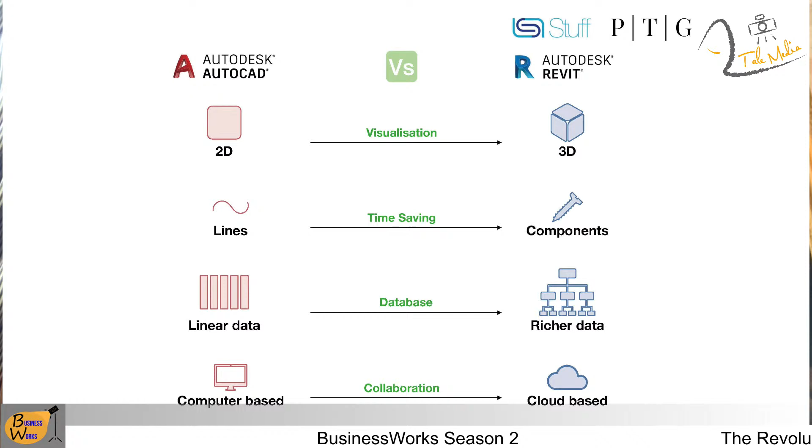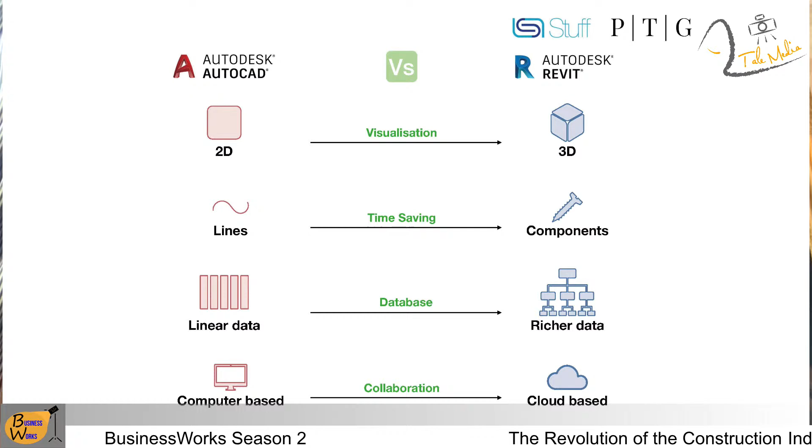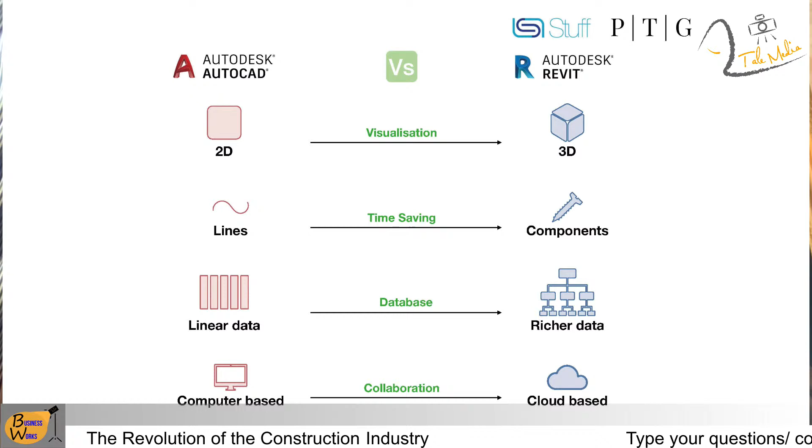So in effect, what is the difference between the Revit package and the CAD package? With CAD, it's very two-dimensional. It originally was developed for aeroplane engineering and design, so it's very linear, it's all about line. If you look on the left-hand side, down the pink boxes, it's two-dimensional line, it has linear data and it's computer-based. With Revit, it's three-dimensional, because it's componentry - you pick walls, doors, windows, and click them into your plan, but then you have 3D richer data. It also links directly to VR, so immediately you have a VR model to walk around and look at. It's incredibly fast to move, and that is basically how you can do jobs within days that take weeks and possibly months using the more traditional routes.

So these are all software packages we're talking about, ladies and gentlemen. Well, it's just two - it's Revit versus CAD. It's the difference between linear and three-dimensional, if that makes sense. So CAD is a software package that they are using right now, and some industry experts are trying to stride away from CAD because it's a 2D model, into a 3D model, which is the Revit software package.

We're going to talk more about these particular packages and how it works in our second segment. But when you talk about these software packages, Neil, you said certain companies aren't even thinking of using these new packages - so how hard is it for a student who's learning these new techniques to go back to a 2D software system where it's the norm for the industry, at least for now? How hard is it to go for a much older software package?

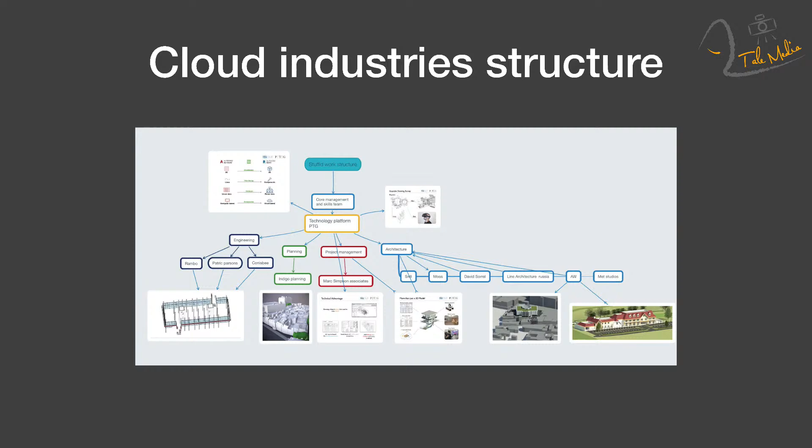What we're doing is building a platform, that yellow area, which, as you can see with the diagrams, uses virtual reality and pulls all the componentry parts using Revit onto that platform so it can be seen at any time, and any clashes, for instance when a beam hits something else incorrectly, will be flagged up. This isn't in the industry at the moment. The technology platform isn't there because the engineers use Revit for their own use, and the other guys do their own thing as well, so it's very difficult to get a clear dashboard.

Okay, so Angela, did I explain that well? Because I'm using you as my... That's the problem, yeah. I think it's very clear as to what the procedure is. So once that's in place, now I'll go to simpler stuff.

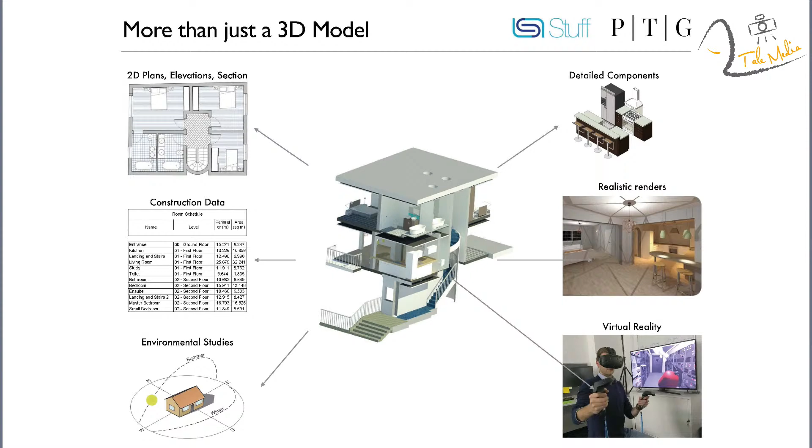If you could go to number 13, to explain how this works. Here is a model we did when developing it. On the left-hand side, that's a typical drawing, but done in Revit, so it's in 3 dimensions. The construction data below is automatically embedded in the software, and you can link it to sun tracking systems and everything else for light. From that drawing, I press a button and get a 3-dimensional model you see in the middle. All of those elements contain componentry things that can be drawn from manufacturers' catalogs and so on. We then press it and put it into virtual reality, and we can make changes in virtual reality and see how it goes. So everything is built around that one straightforward drawing with the dimensions and the componentry. That's how the system works.

Let me see which is the next slide. If you just go to number 15, this shows you how the componentry works. This was drawn, I promise you, in a very short period of time, about a day. It's a very large shopping centre in Northampton. If you look at the drawing in the top right-hand corner, you can see how all that componentry explodes out. That's how the drawing's done. If we use CAD, it's all done by line and connected. This isn't—it's all done in that way, and that's what enables you to do when you're designing things.

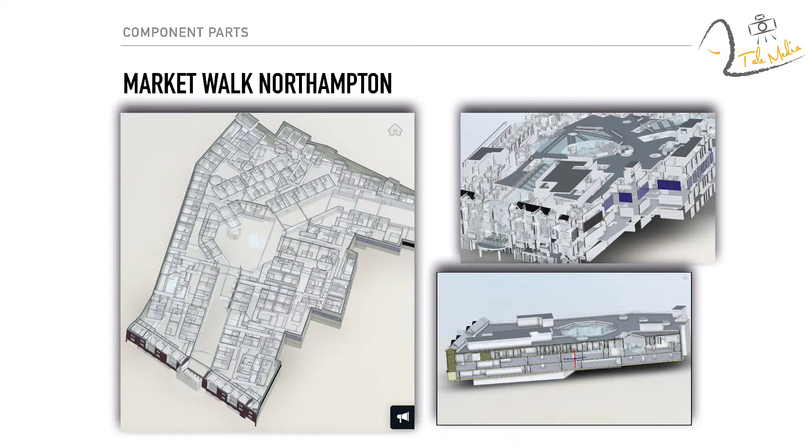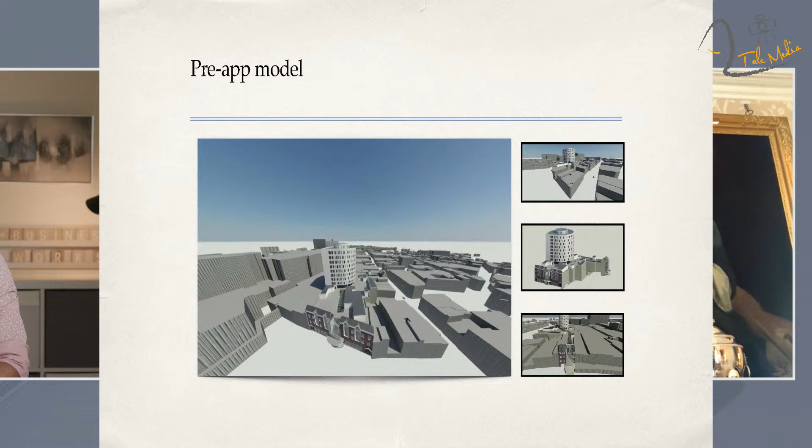If you could go to number 20. So once you've got all the tech lined up, everything's done. By the way, we can do surveys by satellite that will be accurate within 50 millimeters on the buildings themselves. But just to give you an example of how flexible it is, we had to come up with a few ideas. This one is for a student residence. If you could then click to the next slide.

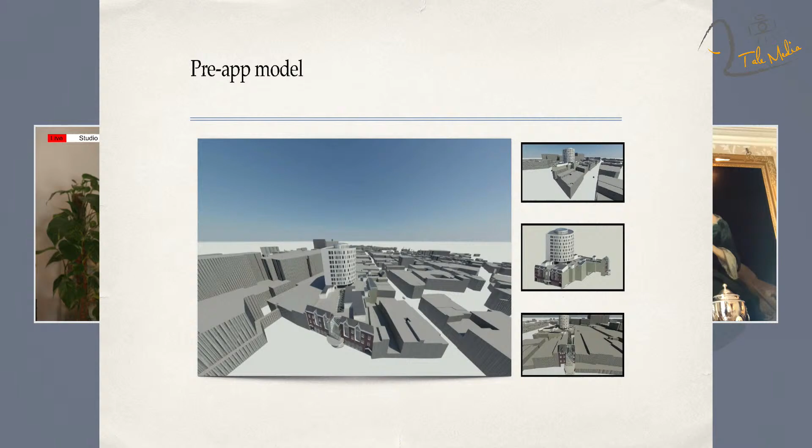The local planning authority didn't like the height of the building and they didn't like the way we put it into the context of what we were designing. So we then were asked to look at a different scheme. Again, within a day, no more, we used the componentry design and we dropped this in, which is 3-dimensional, and obviously it's got VR capability.

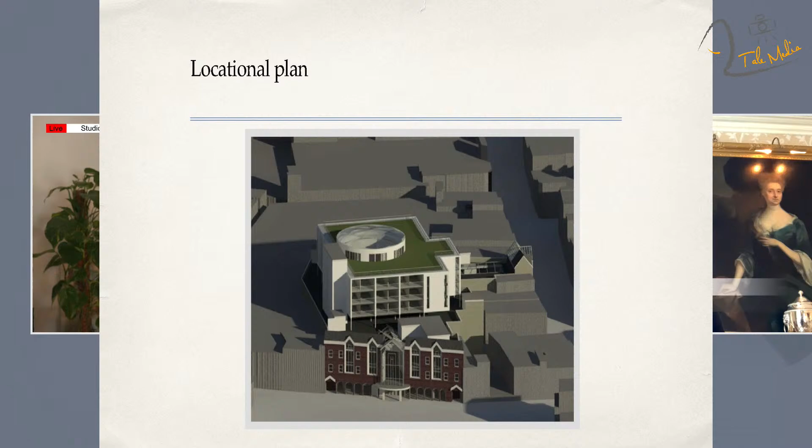And if you could move to number 22, again, what the planners wanted us to do was to reflect the design of the front of the building. So if you look at the picture on the right-hand side, you can see there's a lot of verticality in that design. But then with the residence block, we needed to reflect that. And that's the planning scheme that's going through.

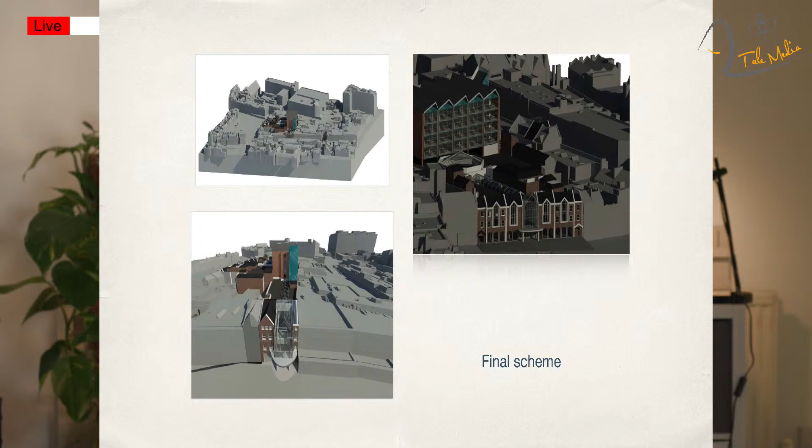Now, in a previous life, I promise you, to do 3 of those drawings there would have cost an astronomical amount of money - maybe 60, maybe 100, maybe £200,000. All of this was done for under £10,000.

So that shows you how the flexibility goes, but more importantly is that technology platform that feeds all that stuff into it so that we can get very quick responses, very quick costs. And the client - the most important thing - is able to see the changes that are required, which is the most difficult thing, because I've spent my life doing architecture. I have a 3-dimensional mind, I can see things, but it's not necessarily a God-given thing for everybody. So to help people understand and make them understand why they're doing the decisions is a very important thing. So I hope that helps.

Indeed, Neil. And then I just, like when you started explaining this, I have a brief question for you. Let's say when you talk about this new system, this new 3D system, you were talking about there will be less time. It's been in the market about 7 years. 7 years it's been in the market, yeah. Okay, so it's been in the market for 7 years. So what do you think about the time and the resources and the money that people spend on, let's say someone's constructing a shopping mall, and then if a construction company is using Revit as opposed to CAD, what are the benefits that they will gain? Is it time? Is it resources? Let's say, is it the money that you spend? What are the main benefits of this?

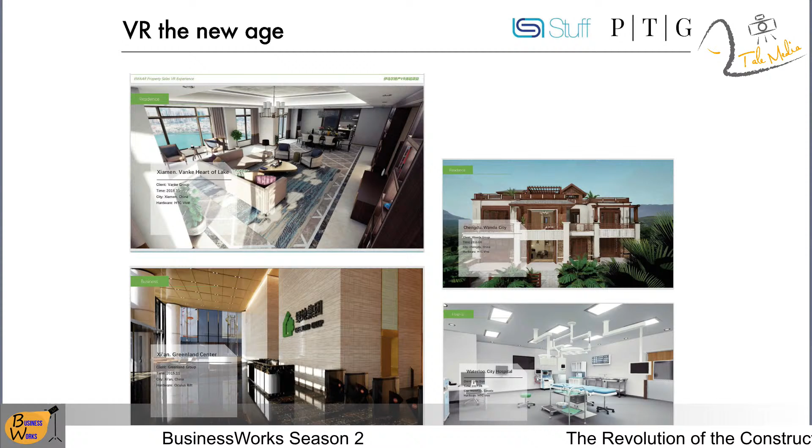Let me take you through a little journey. If we could go to slide 12. This is really the clever end of the software - what you have to do is put in all the drawings and componentry, which as we've talked about, is faster and uses less people to do. It's very effective. Then there are different types of software that can be hooked into Revit to produce virtual reality walkthroughs using headsets.

The trick about virtual reality is, for those really into the technology, you need to make sure where your data points are within certain areas of a building. If you've got a very big building, you don't want to go through the whole building because that's very expensive. But you might want to pick out the reception area, data point that and render it, and then someone would put a helmet on and walk through that whole building as if it was live.

It's a three-dimensional model, so it's extremely exciting for someone who has seen the drawings and then they're shown how it looks in reality. If you could go to the other end of the spectrum, go to slide 16.

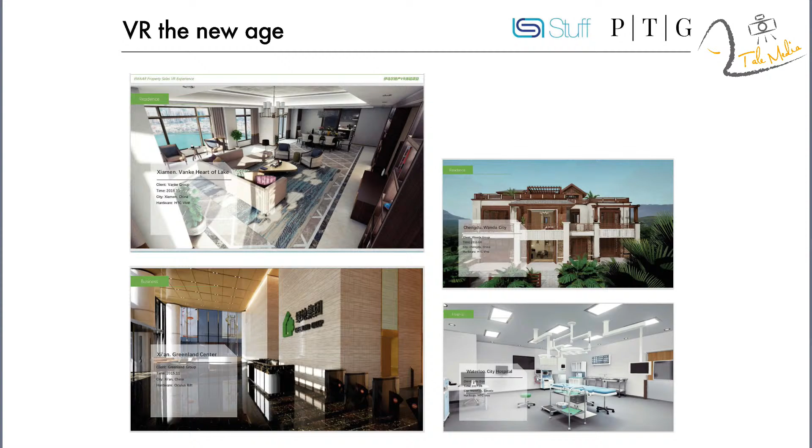Now, what happens when you're designing and working together as a collaborative team? Often you need ducting that will affect the internal space, and therefore you need as a team to be able to see it on this technology platform, and then make the adjustments because the ceilings are too low as a clash with a beam.

And then you can even walk around these models with a virtual reality thing. So I could go into this building, walk along, look at where the ducting is without the ceilings, see where the clashes are, and then get those corrected.

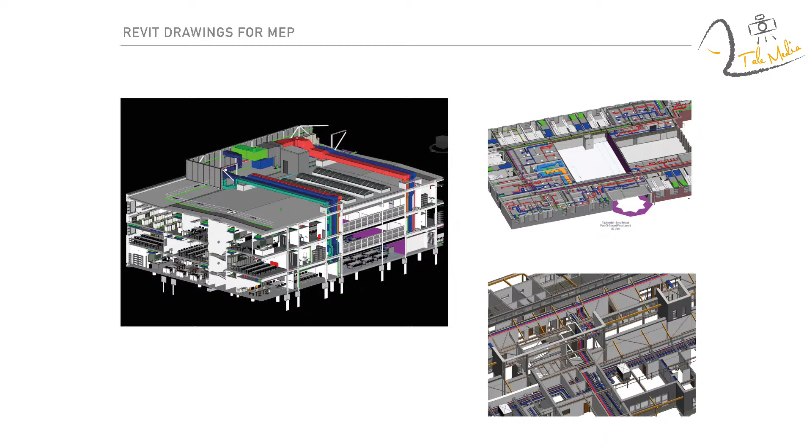And then we could go to a client and say, look, if we do this particular idea and go this way, it's going to cost you £15,000. If we do it this other way, it's going to be £25,000, but it's a much better result for your product. And they would put the helmet on and they would see the impact of that, both from a technical point of view, but more importantly, the virtual reality thing will have changed in the foreground there. So it shows you the dexterity of how it's a total solution with everybody working and seeing together.

That's the power of this. Right, so that's a couple of practical solutions. And Neil, when you talk about VR systems, can you not use the CAD software system to generate a VR image where you can walk around the design?

Yeah, no, you can. It's a fair question, and the answer is yes. Of course you can, and you can use Adobe and all the various things you need to get those renditions and stuff. That all is still around and can be layered on it. The most important thing is that it's an integral three-dimensional model of the whole building before it's built to make all of those decisions.

It's real time, real design, but it's digital, and that will save money. We always account for around 5 to 10% for what we call variation orders, so when things change, we allow for that. Can you imagine a job of £100 million with 5% as an error rate on that job? When we use this sort of technology, we might have an error rate of 0.5%. So can you imagine saving £5 million just on the fact that the technology is working in an integrated, collaborative way? Yeah, indeed, that's the sort of thing we're talking about.

At Fit2Trip, we want to offer travel insurance to as many people as possible. But all travel insurance companies want to do that, right? Well, no. If you suffer from a disability or have a medical condition, you may find that you're not covered by your current travel insurer. Deep in the small print, you'll see that most travel insurance policies will not cover medical or cancellation claims if you've suffered from or have an existing medical condition, like diabetes, heart disease or cancer. Fit2Trip is different. We use our online medical screening system to assess customers based on their medical condition and destination, and provide them with travel insurance tailored individually, covering them and their medical conditions while they're travelling. By just answering a few questions, you can get an instant quote from a choice of products that provide some of the highest cover levels in the market. So enjoy travelling, safe in the knowledge that you and your family have that extra protection. Fit2Trip - travel insurance to fit you.

Welcome back to BusinessWorks, episode 7, where we are talking about the revolution in the construction industry, and about this new software package that will help and revolutionize the construction industry. Most industry experts are not using it yet, but this will be a major software package that people will be using in the future.

We have Neil Whitehead talking about the usage of this software and where he uses it. He recommends people use this because of the advantages, like saving money and time, and your designs will be more accurate than with other software packages like CAD. The accuracy rate is higher than other software packages.